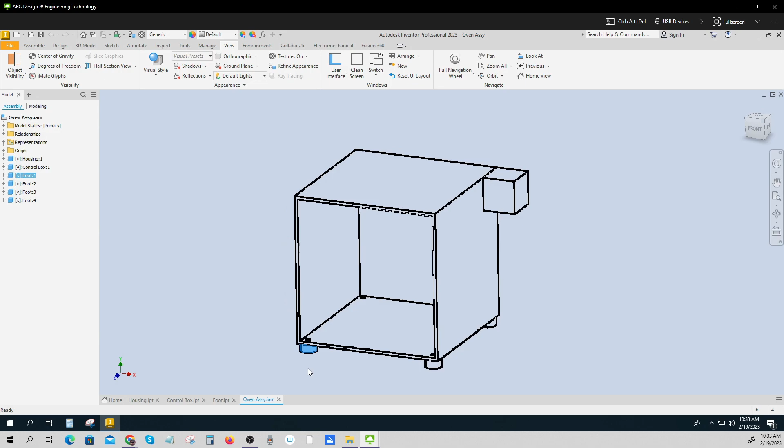And if I ever make a change to this foot, it will come through here. So let me just demonstrate that. Maybe I want my foot to be much longer than it is right now. So I can go to my foot and extrude that, maybe instead of half an inch, I'll extrude it 3 inches so it looks remarkably different.

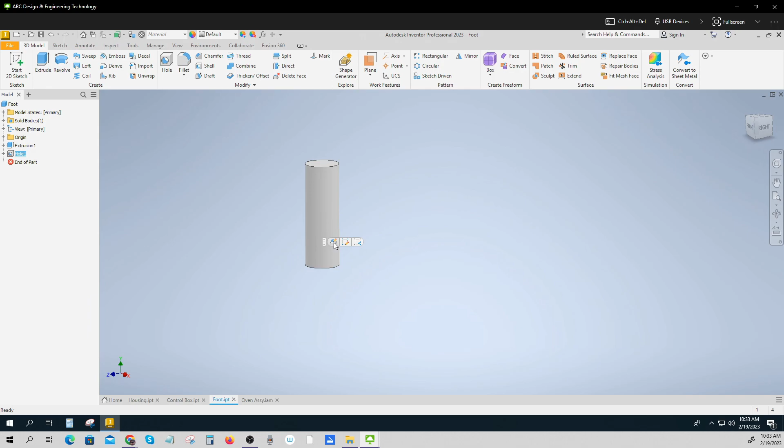And then I think my hole has to go all the way through. Put my hole all the way through so that it goes through. So now I've got a significantly different foot. And when I save it and go back to my assembly, look, it goes through.

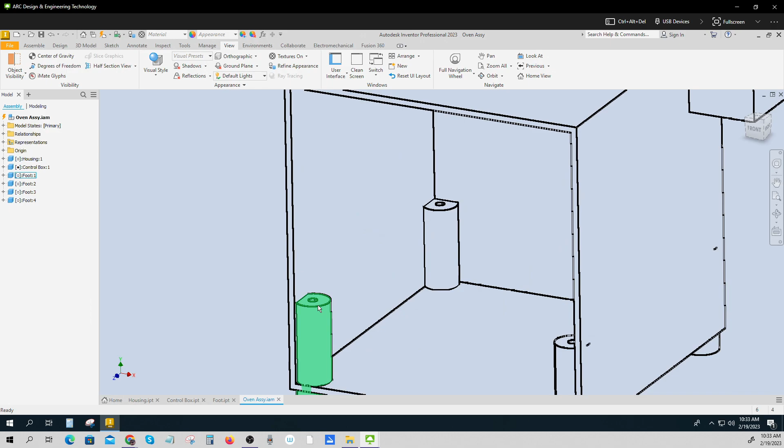It's changed. Now, you can see that it didn't match up exactly how I'm interested in until I actually update it. So that's one of the reasons why you do each thing as a component and put them together. Now, that takes a little bit of thinking when you put it together how it needs to be done.

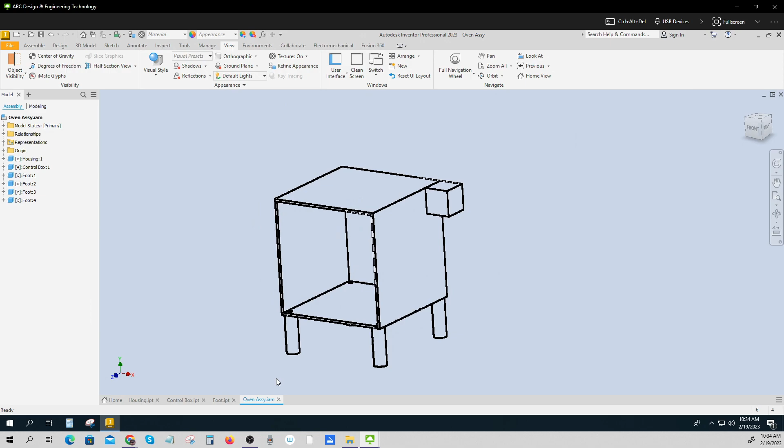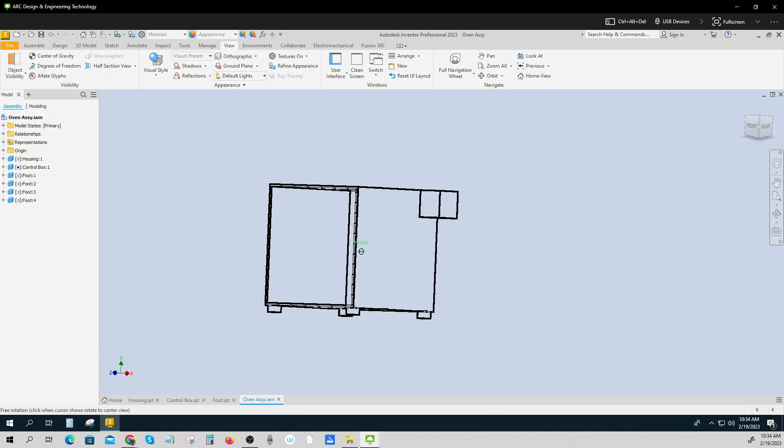I'm going to go ahead and change this back to my half inch because I think a 3-inch tall hole there looks a little ridiculous. And again, when I come back to here, they're in the wrong place until I update it. And so that's kind of how we do a simple one and why we do these as assemblies.

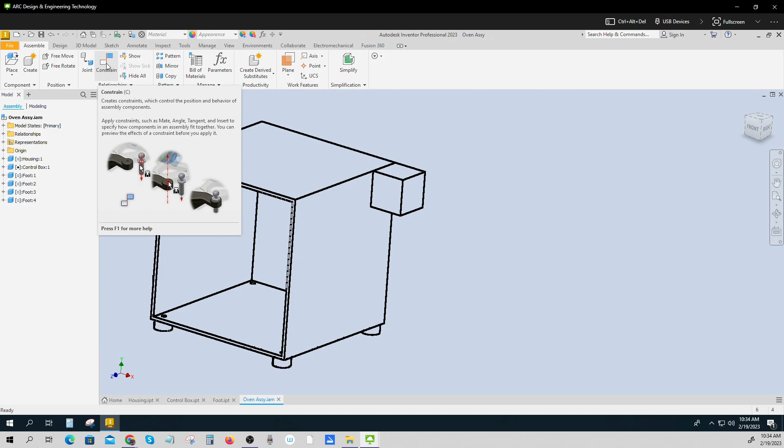Now, I'm going to give you some hints in another video of how we put them together. When we assemble them, first we place the parts, and then we do what's called constraining them. We make sure that they line up appropriately like we want it to. Okay, so when you do your designs, you have to be thinking about that a little bit.

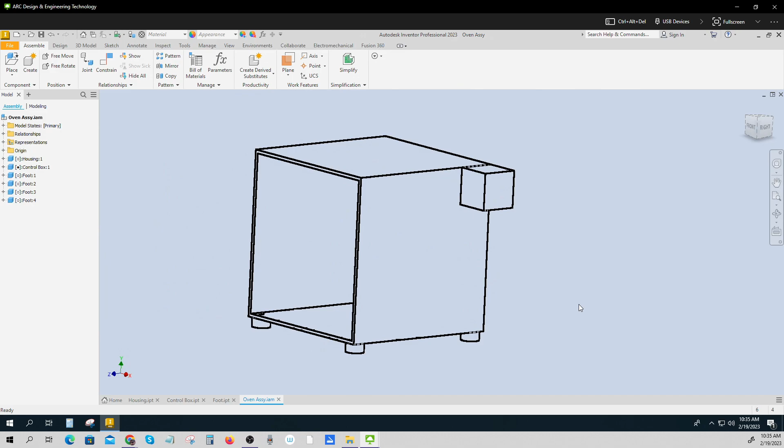In this design we're doing this week, it's not super important. But when you get into the design mode, it does become important. But we're just doing some basic ones right now. And you can see this sort of looks like a part of an oven.

There's a housing and a control box, some feet. What does it still need? Needs a heating element in here, probably a shelf and a door. Right? So you want to have each of these items as a separate file, a separate component, a separate part. And when you assemble them, they all come together in one file. Okay, so that's how an Inventor assembly works.

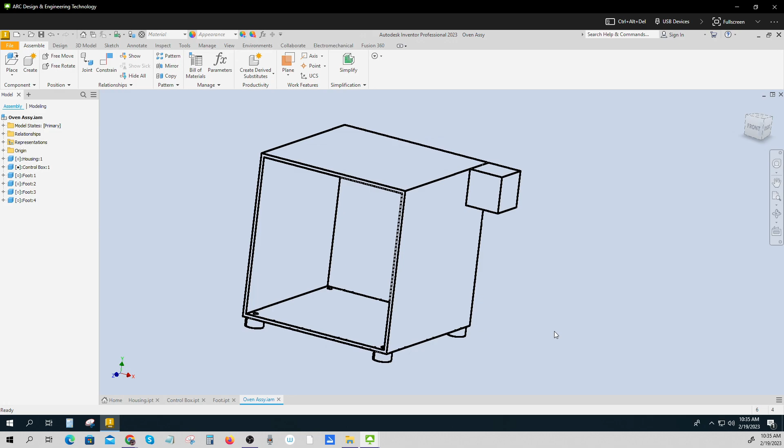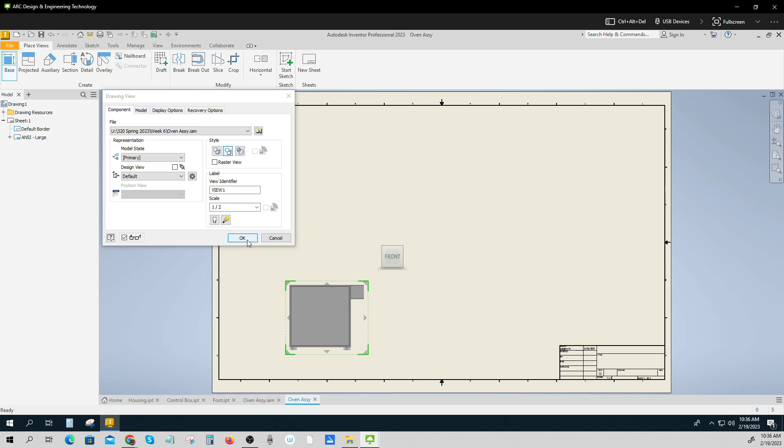Oh, let me show you just one more thing while we've got this. The other nice thing I can do is make a drawing of it. If I right click and make a drawing, and this will be on a huge piece of paper because I'm not really paying too close attention. So let's say that's going to be my main view, and then I want to project. There we go, kind of got that.

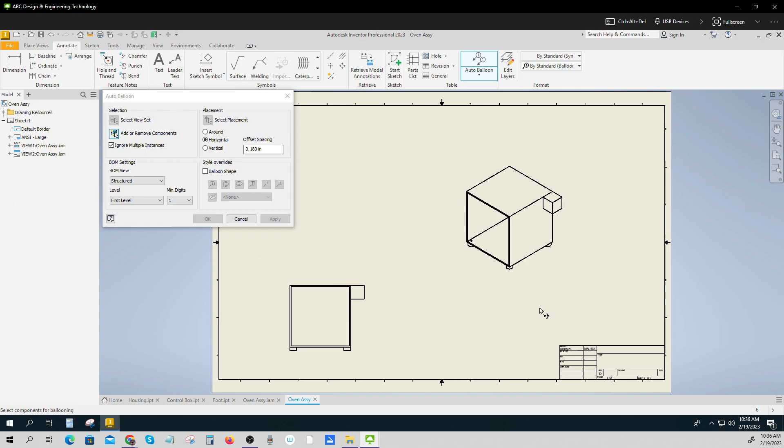So because that drawing holds all this information, I can annotate that by doing auto balloons on this view, and I'm going to put them vertical over here. I have to add my components and then put them over here. Look at that, it does its thing for me.

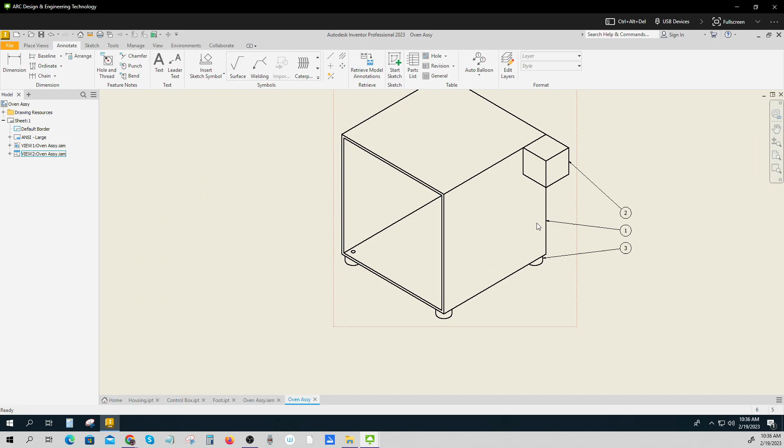Isn't that cool? It makes a little thing that says item 1, 2, and item 3. But then I want to do something called a parts list. And that all looks okay. Make it from the stuff in that view.

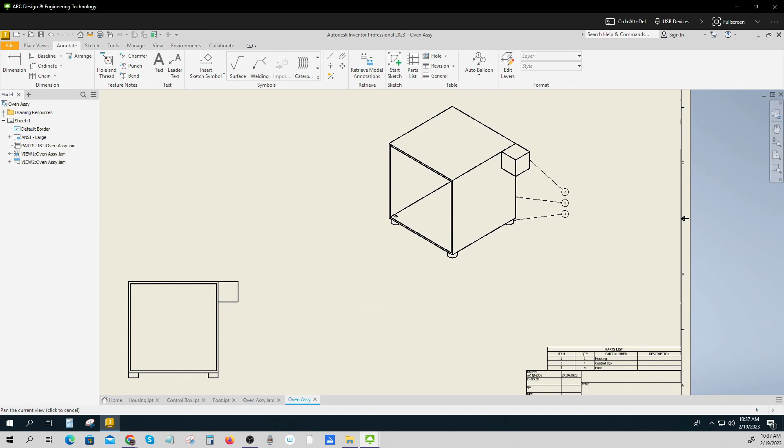And down here, I can see that item number 1, which is my housing, I've got one of them. Item number 2, which is my control box, got one of them. And item number 4, which is my foot... item number 3, which is my foot, I've got 4 of them.

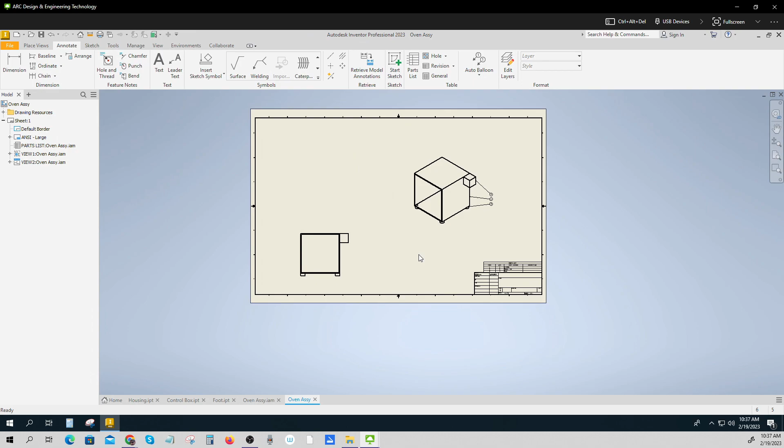And so this is one of the beauties of Inventor, making each one a component. I can quickly get this information and put it in a manner that would normally be used in manufacturing. So that's the gist of how Inventor Assemblies work. And that's our goal for this week, is to create Inventor Assemblies.